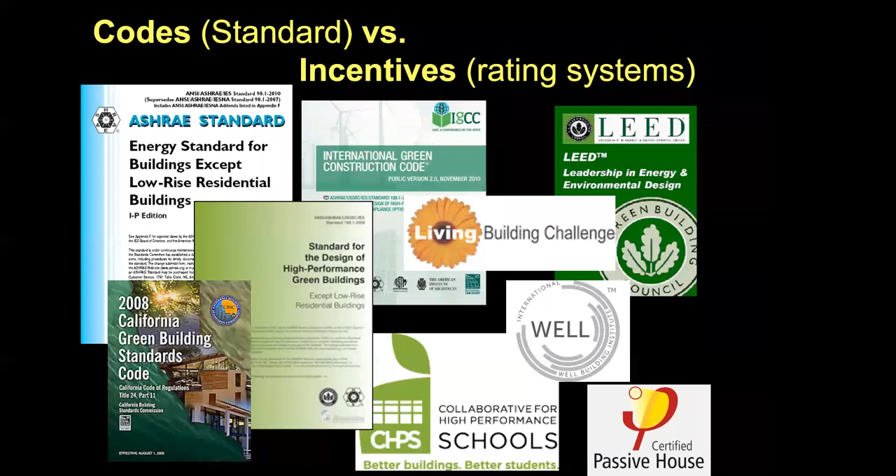So what do I mean when I'm talking about standards and rating systems? I kind of see standards as the floor and rating systems as the ceiling. One way to think about that is: what's the worst we can do? What's the best we can do? Let me break that down a bit. You can see from this screen there's a lot of them out there, and I've only done screenshots of a few as examples.

So what do I mean by this difference? Codes and standards, these are the rules that are the floor. This defines the worst building that you can legally build. So if you ever hear people bragging that, oh yeah, I met Title 24, it's like, well, you kind of had to. That's not anything to brag about.

Now you might hear people say we beat Title 24 by a certain percent, and that is a more appropriate way to phrase your performance. We're going to be talking more about these codes and standards on Monday, but today I'm going to focus more on the incentives, what I call the rating systems. This is where the rules encourage you to do better. It's how high can you go, how much better can you do than standard practice? There's a lot of different systems out there, and what we're going to show is that these rating systems also bring the floor up.

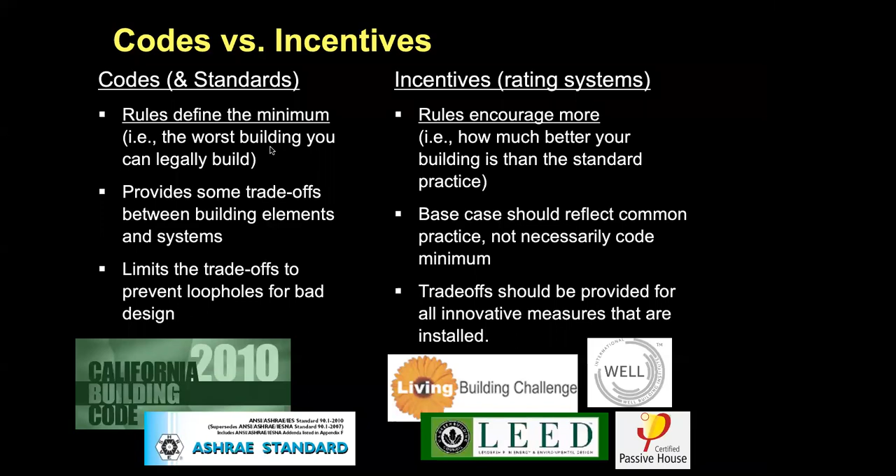So let's start with LEED. Now, a lot of you have probably heard of LEED, it's been out there for a while. LEED stands for Leadership in Energy and Environmental Design. I want to note that LEED is not the only rating system out there, and it also isn't the first. Take a look at all of these icons.

Actually, the first one was developed in the United Kingdom, called BREEAM, first launched in 1990, and it's actually the model for a lot of others that followed. Whereas that one was the first, LEED has actually gotten a lot more attention, but there's a number of others out there from different countries, for different applications, for different building types. Today I'm just going to focus on 3 of these: LEED, the Living Building Challenge, and WELL. Then I'll give you a brief introduction at the end about some of the newest ones that are out there.

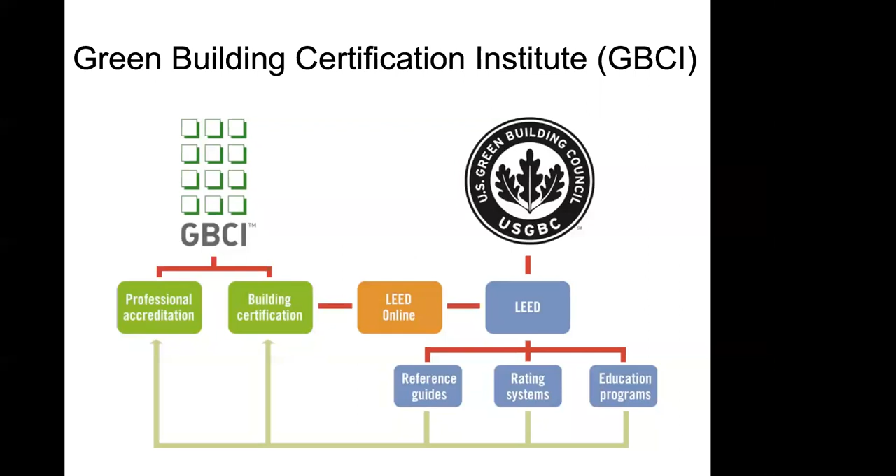And once GBCI was developed, it turns out that a lot of other organizations took advantage of this system, and many are now using GBCI as the independent third-party organization for certification.

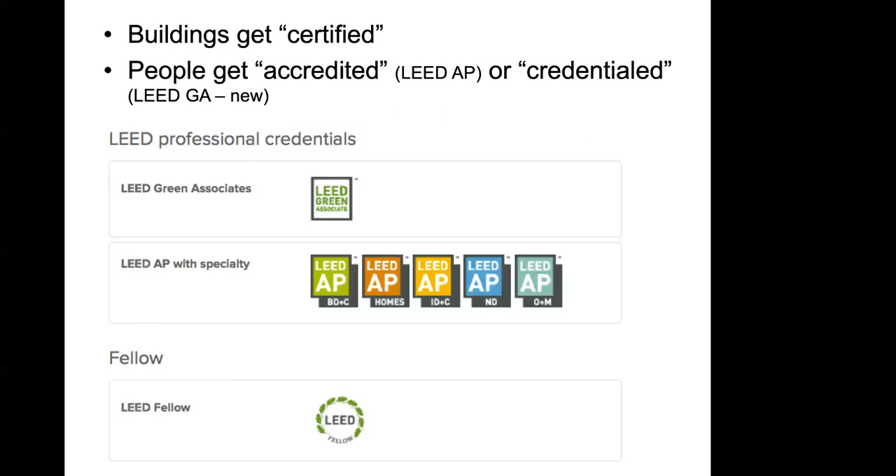LEED in its early years got a lot of criticism, and I think rightly so. There were a lot of problems with it. It really started with an aim of changing our language, changing our focus, transforming the market. And without a doubt, no matter what criticisms are out there about LEED, it has transformed the market, so for that alone it should get a lot of credit.

But it listened to a lot of the early criticism. The current version is LEED version 4, which I'm going to show you in a minute. But LEED 3.0 is really when a lot of the changes took place to address those early criticisms.

As the LEED systems grew, they wanted to harmonize and make things more consistent. But more important are the second and third changes. It was felt like there wasn't enough discrepancy in the points — energy efficiency got the same point as having a bike rack, even if you were in an area people couldn't even bike to. That shouldn't be the same.

So they developed a whole list of environmental impact categories such as climate change and resource depletion, et cetera, and did a lot of analysis to make sure each of the points were given for what matters most. Then the third category was really interesting.

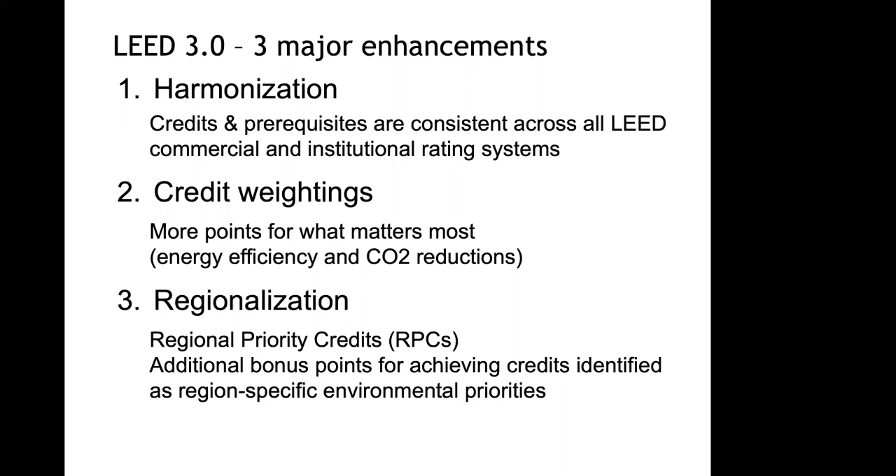So they did this interesting thing: regionalization, by creating regional chapters, councils and affiliates with people of different expertise. For a project-specific location, 6 of the LEED points were identified as high priority for that region, and if the project earned one of those credits, they got an extra point — kind of like extra credit.

Our current version of LEED is LEED v4, officially launched in late 2013, and that was the version with the most rigorous changes. I'm not going to take time to go over all of these — this slide isn't something you'll be tested on, but it's an overview if you want to go back and see what some of those changes were.

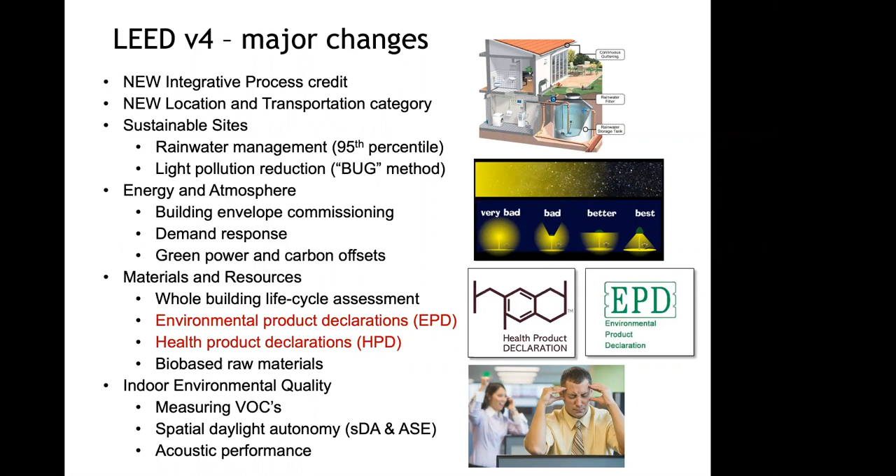What I do want to talk about is the two things identified in red: the environmental product declaration and the health product declaration. These are really important because they're part of a larger movement we're calling the transparency movement — I'll show you more of this later. The idea is that if we can be more transparent and inform design professionals what's actually in their products, they can make informed decisions.

It also motivates manufacturers — if you want credit for people using your product in the building, you have to have an EPD or an HPD. That means if you need to be transparent, you might want to pay more attention to what's actually in your product.

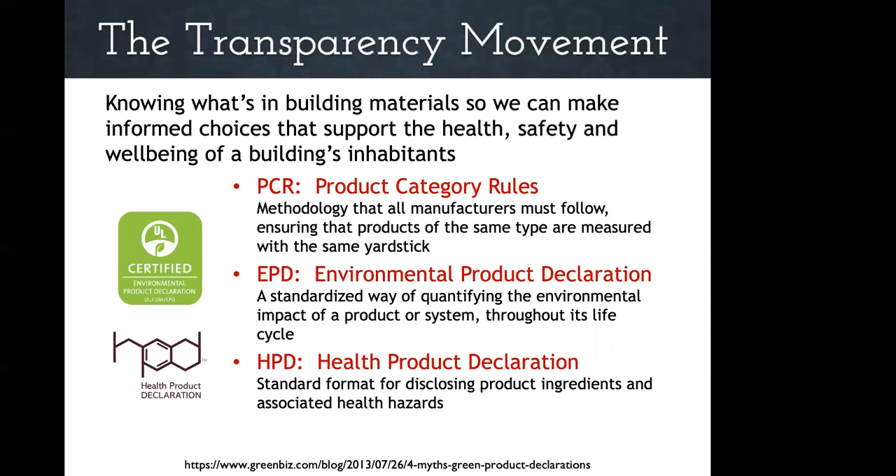The EPDs are basically a report summarizing what comes out of a life cycle analysis — all the environmental impacts from harvesting the material, to transportation, to manufacturing, to disposal. The HPDs include all of that plus the effects on human health. So the HPDs are a lot of what Sarah was talking about yesterday.

So where's LEED heading? I talked about how there's been LEED v3 and then LEED v4, and the whole idea is that this should be a constantly evolving rating system where as we become more educated, as technologies become available, as our ability to simulate and predict performance becomes available, we're continuing to raise the bar so that we become net zero at lower levels of certification, and ultimately things become not just about minimizing the negative, but become regenerative, where you're actually trying to reverse the damage and have a net positive impact on the environment.

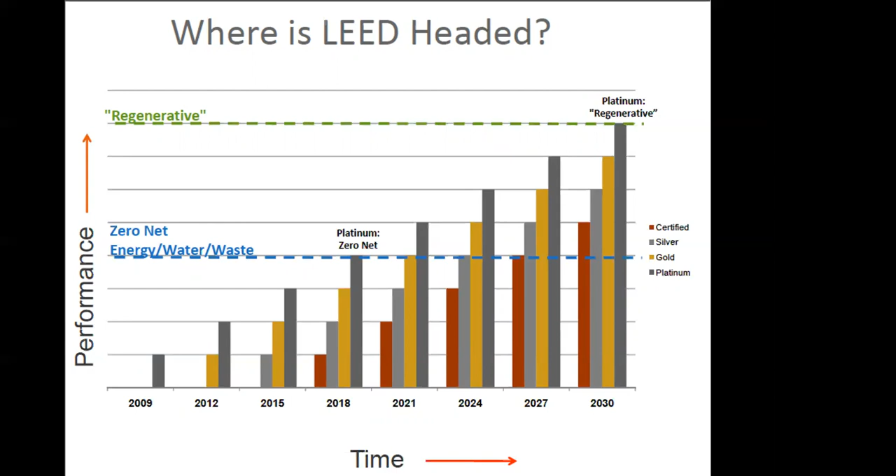And what's happening as the bar gets raised for rating systems, they're lifting up the standards along with them. I think that has been really important. That's where we have a relationship between the floor and the ceiling. So the rating systems are raising the ceiling and they're pulling the floor up with it.

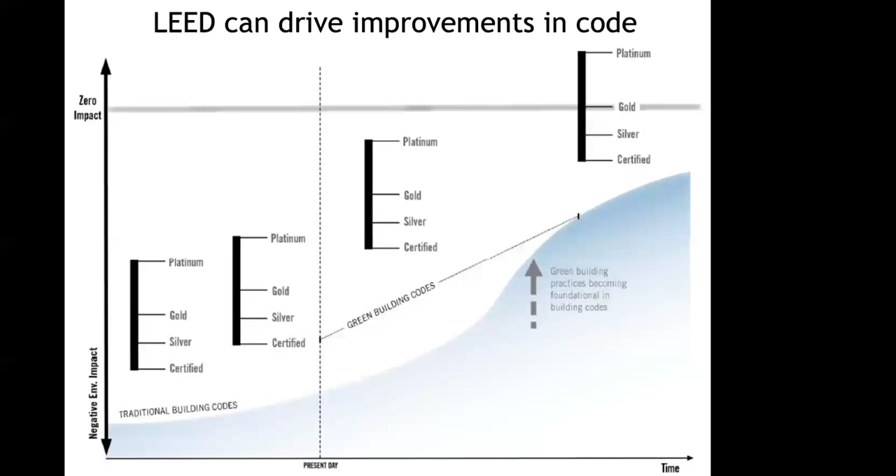All right, so the next thing I want to do is talk about the Living Building Challenge. The Living Building Challenge was put out by the International Living Future Institute. Some people have called it LEED on steroids, so it's a much higher ceiling, if you will. And it uses the metaphor of the flower, because everything's based in nature and rooted in place. I have to say personally, I've always had a little bit of a problem with the idea of a flower—I don't have a problem with flowers, I have a problem with flowers as the metaphor, because durability is really important and flowers are not very durable. So I'm not sure about that, but anyway, that's not that important.

Here's what's really important. The most important differences—and this is a classic exam question, wink, wink—between LEED and the Living Building Challenge are that while LEED has a combination of mandatory measures and point chasing, for the LBC everything is mandatory. So you have to do it. And that's kind of interesting.

The other thing that's really important: whereas with the LEED systems, I said that the only one that requires performance measurement is LEED for existing buildings—everything else is about intent—LBC is only about actual performance. You have to monitor your building for 12 months after occupation to get certified. So no matter what your intent is, you can't even get certified until you've had all of that data.

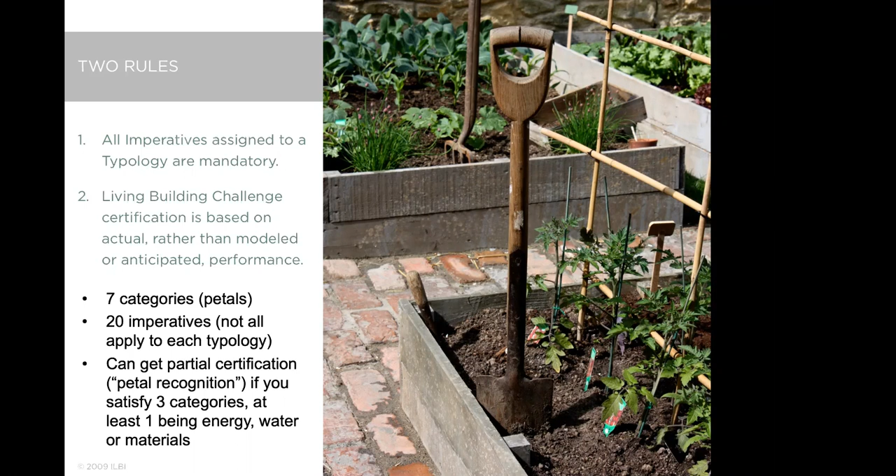So its organization is actually a little bit simpler. Like LEED, it has categories, and they call those petals because of the metaphor of the flower. There are only 20 items, or what they call imperatives. They use the word imperatives because it's all mandatory. You have to have all 20 in order to get certified, but they do allow you to get partial certification called petal recognition if you satisfy only 3 of the 7 categories, with at least one of them being energy, water, or materials.

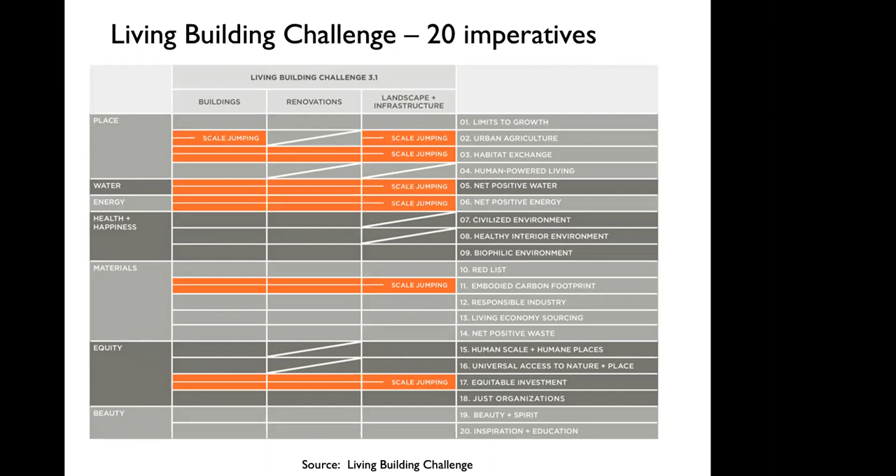And the orange bars represent this idea of scale jumping. So for example, maybe you have photovoltaics, but you're doing it on the community scale because that makes more sense than on each building. So there's a way of jumping across scales.

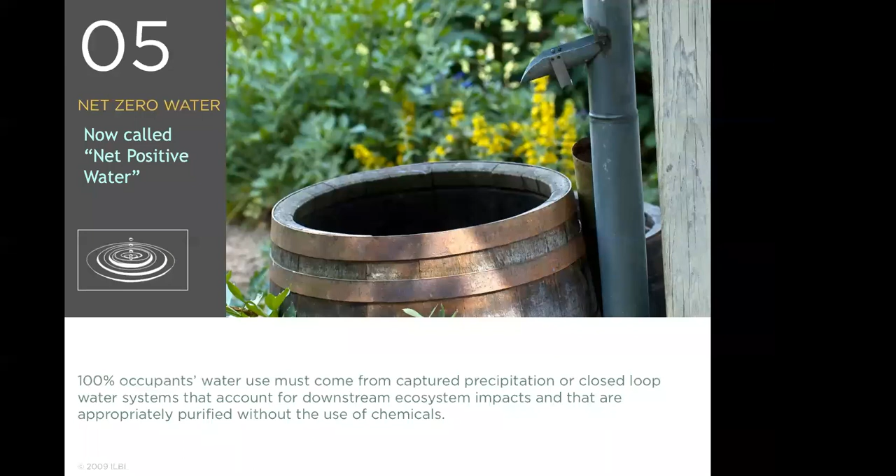So let me give you a few examples of some of these imperatives, the ones that I think really set a high bar or are most relevant to what we're talking about in this class. Any building that gets Living Building Challenge certified has to be net zero, now called net positive water. This means all water must come from captured rainwater or closed water systems where you're cleansing the water, gray water systems.

We talk a lot in this class about net zero energy, which is also now called net positive energy, and we've talked about that. This is where on a net annual basis, you are generating at least, but in fact now more than, you're actually using.

And then Sarah referred to the red list. This is probably the hardest imperative to meet. There's a really long list of chemicals that you cannot have in your building, and even on the job site while you're constructing it. So I've heard from practitioners that this is really the hardest bar.

Now, two more that are really interesting that I wanted to share with you. One is called the beauty and spirit imperative, which really speaks to the heart of the project, suggesting that every project should have some features that are solely intended for human delight. Now, how would you measure something like that?

It's interesting, there are different ways. Some people have actually used the CBE survey as a way of getting occupant feedback to measure this. But when the Living Building Challenge was first being launched and talked about, one person made this wonderful suggestion, that the way this imperative should be measured is: the project should make 1 in 50 people smile, 1 in 100 people laugh, and 1 in 200 people cry. Now, of course, documenting these statistics would be very difficult, but when's the last time you even heard someone talk about the built environment in this way?

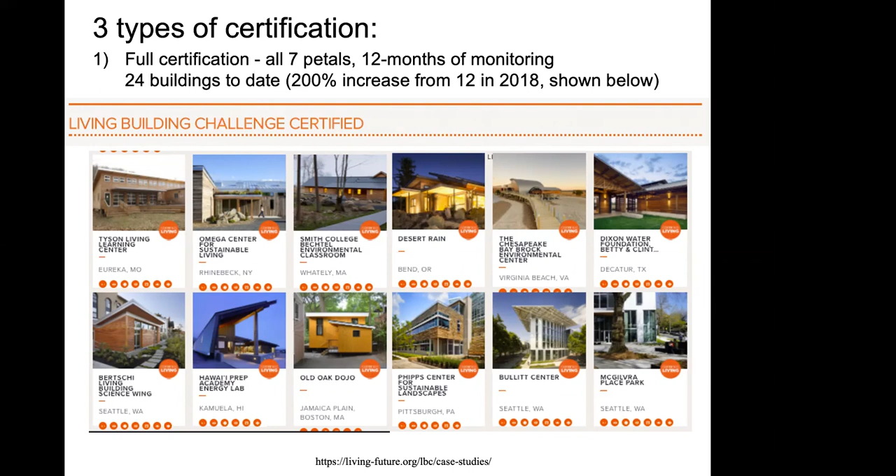Remember, you can also do petal recognition, where you have to meet just 3 of the 7 categories, but at least one of those has to be what's considered the most important, which is energy, water, or materials.

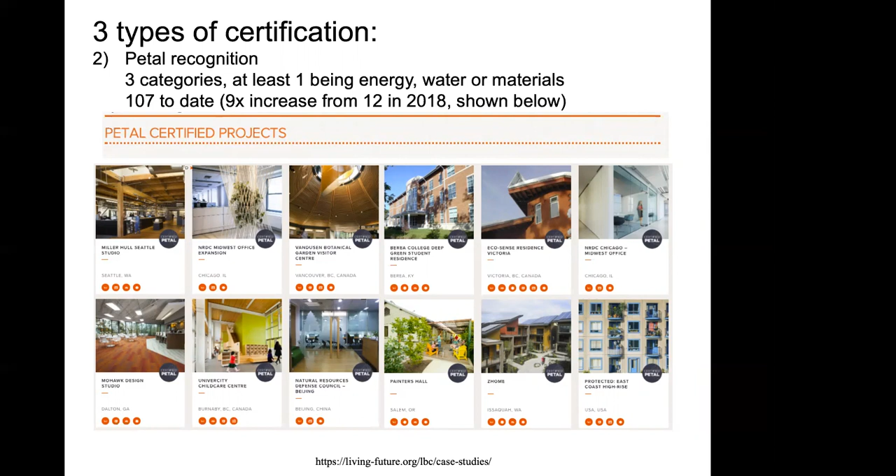There are 3 types: full certification, petal certification, and then they created the net zero energy building certification. That's where it must meet the imperatives, not only the net zero energy imperative, but also other imperatives like limits to growth and rights to nature, which involve access to air and sunlight, biophilic design, and the beauty and spirit I mentioned.

There are 37 projects that are now net zero energy building certified. That doesn't mean these are the only net zero energy buildings out there—there are a lot of net zero energy buildings out there, they just didn't need this label.

I'll pause again for any questions on the LBC before I move on. None? Last chance, 5, 4, 3. Oh, there we go, okay.

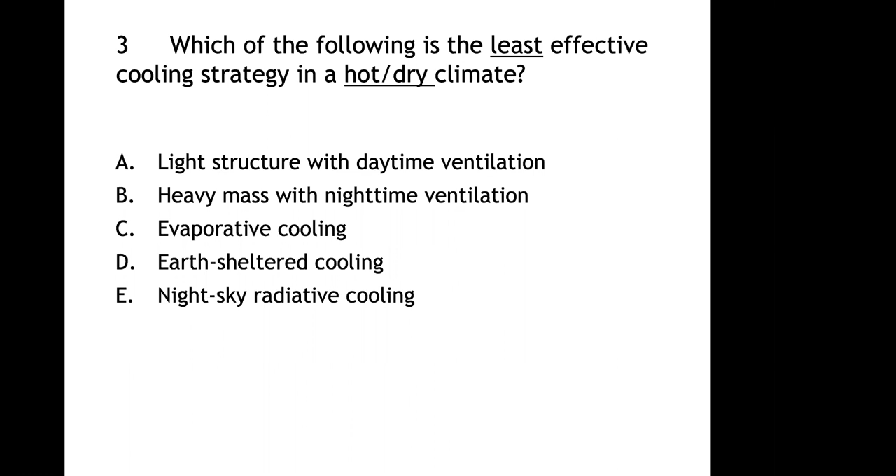Which of the following is the least effective? The answer is A, the light structure with daytime ventilation. Remember, there's a lot more options for passive cooling in a dry climate, and all of the others work well there, but the daytime ventilation is really best for bodily cooling in a humid climate.

Evaporative cooling strategy, spraying water is less effective - that is false. Remember, we talked about the surface area is important. So for spraying water in the air, the surface area of every droplet is what's affecting the rate of evaporative cooling. This was from Stett's lecture.

Drum roll, the answer is XPS foam. He talked about it, he showed graphs, and without a doubt, that was just over and above, had the highest embodied carbon, evil material.

And then finally, this is also from one of the graphs he showed: as a building becomes more energy efficient, embodied carbon becomes a larger percent of the building's total emissions, and this is true. The total carbon emissions from a building is its embodied carbon when it is first constructed, plus its operational carbon over the lifetime of the building. And the more energy efficient, the larger the percentage of that embodied carbon in the beginning.

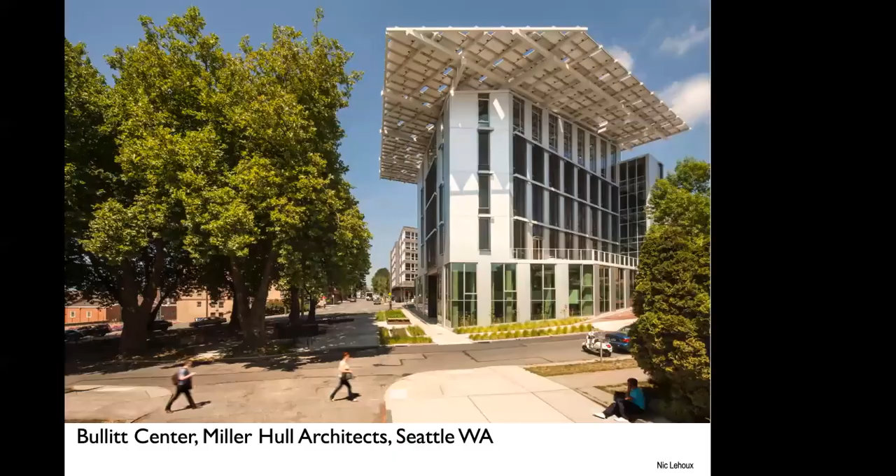Okay, let's move on now. I wanted to describe a little bit about the Bullitt Center, which is the largest building to date, I understand, that has gotten full living building certification. Rob Peña, our speaker on the second daylighting project, was heavily involved in this. He talked about it a little bit, so I just wanted to tell you a little bit more.

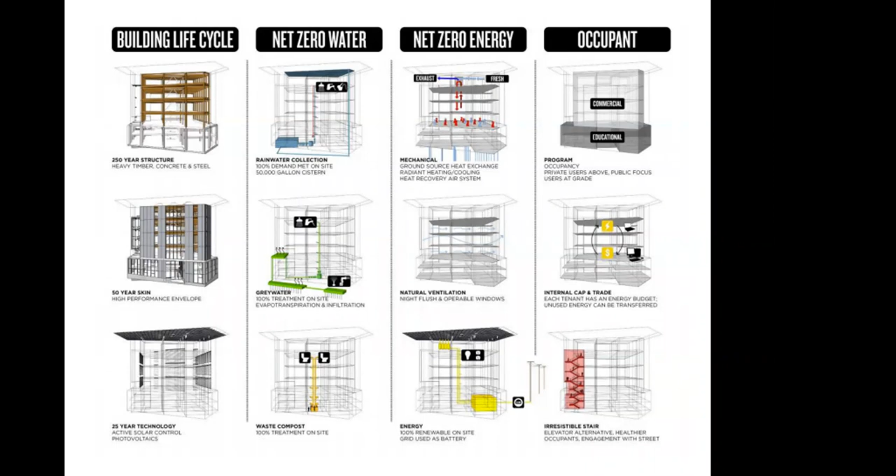This diagram, I'm not going to go over in detail, but I'm showing it to inspire you to look at it on your own. I think it's one of the more cohesive ways I've seen somebody try to present the way in which the strategies in a building are organized. This one looks at life cycle, water, energy, and occupant issues, and some of the systems at different scales. So this is a really nice way of organizing data and strategies - maybe that's something that you can be inspired by.

As well as this one, you see a lot of diagrams from projects talking about the systems in a building, and this is also one that I think was really well organized by breaking it down into the heating and cooling, the envelope, the energy, and the water conservation.

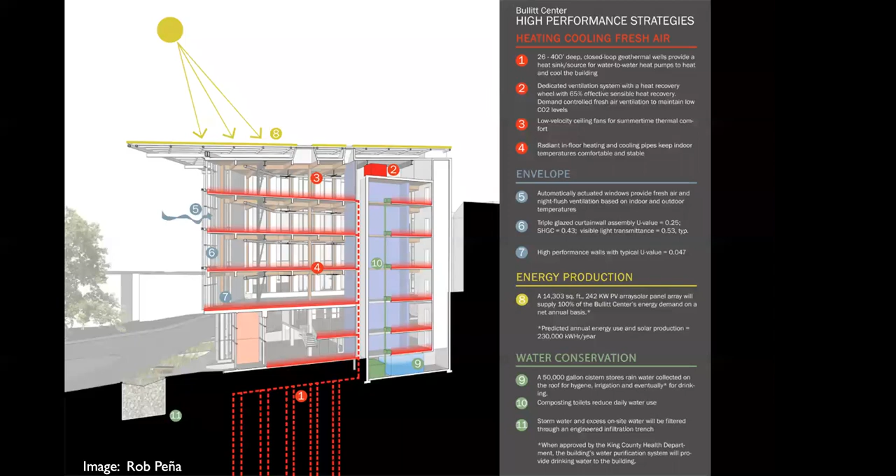So for this building, it's getting all its energy either from the sun, hitting the photovoltaics on the rooftop, which is what we'll be talking about in a moment, and it's also got a geothermal system for generating heating and cooling as well.

Highlighting a few of the strategies in the building for energy conservation - the first way to approach energy conservation is to make sure you have a really good high performance envelope.

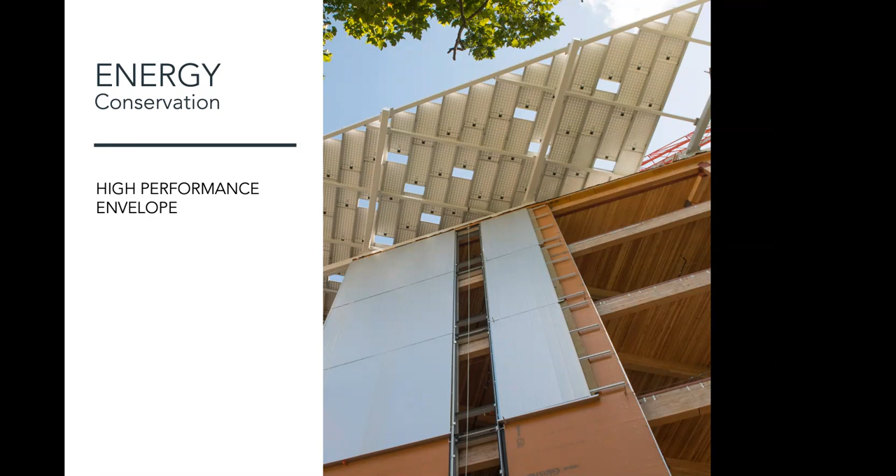Well, that's what they did, but in this case the manufacturer decided to reformulate, and the first application of this new product is on this building. What's interesting is it also benefited the manufacturer, because now they can market this material as a product that meets LBC certification. So this is a great example of market transformation.

So why is that a benefit? Well, a few things. One, when it closes you get this really tight, even seal across the entire perimeter, as opposed to casement windows that angle. It also allows you to open the windows when the blinds are down. And it also allows you to better utilize buoyancy-driven flow for stack ventilation when there's not a lot of wind pressure outside, because you can have air that comes in the bottom and then out through the top.

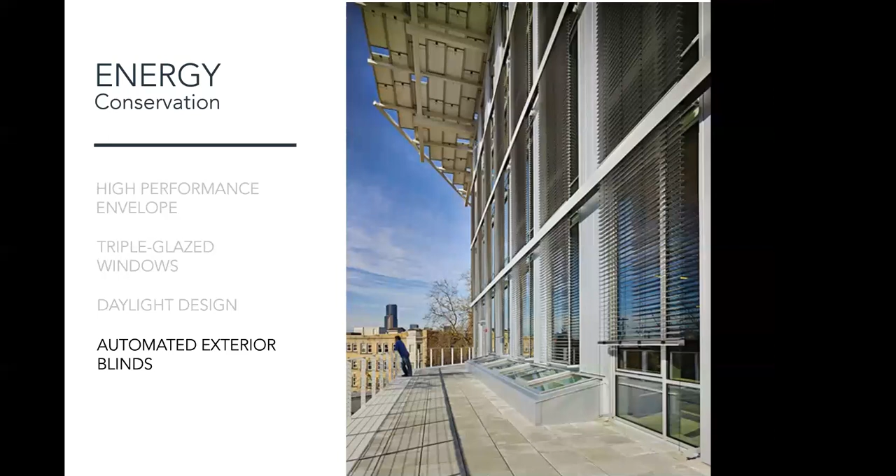I believe Rob showed this picture as well, with the automated exterior blinds. Now, while fixed shading is more durable, and that's what we're teaching you how to do in ARC 140, in a climate like Seattle where it's really overcast on a day you want to get a bit more view, it's really nice to get those completely out of the way. Aesthetically on the outside, they really liked that it gave a very dynamic quality to the exterior facade, really changing its texture.

So the mechanical system - one of the things that this and a lot of net zero energy buildings do is separate the ventilation system and the thermal system. For their thermal system it's radiant, and this is showing all of the PEX tubing in the floor.

They also have a really large system for rainwater collection. The Bullitt Center gets 100% of its water from rainwater collection, which on one hand is pretty extraordinary for a large urban office building. You'd imagine it's got a relatively small roof compared to the number of floors, but it is Seattle and they get a lot of rain.

So what you're seeing here is what's called the day tank, which is the purified rainwater. Behind the wall are 50,000 gallons of collection in a cistern, and the rainwater gets collected in the cistern and goes through a bunch of different layers of a filtration system. The highly filtered water is in the day tank, and that's what needs to be used on a daily basis.

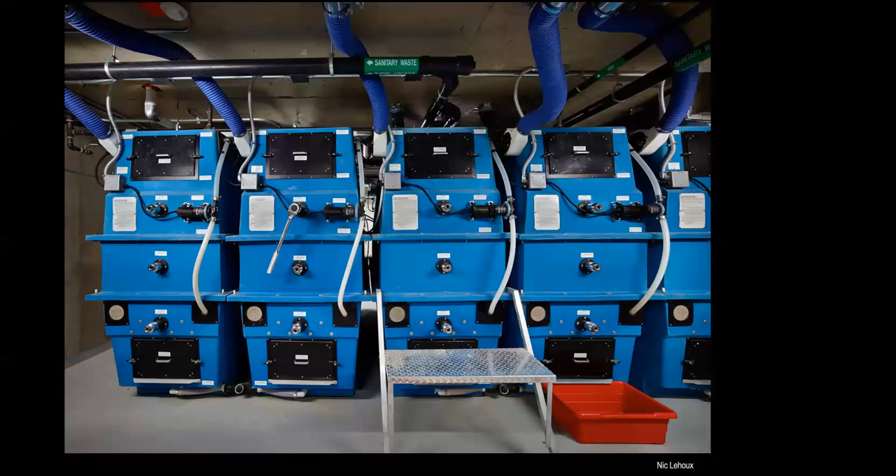It also has a really sophisticated waste management system. These are composters, an aerobic digester system. Each one is hard to see the scale of, so I wanted to show you this picture. Each of those blue tanks is the size of one of these little Fiat 500 clown cars, and there's 10 of them.

The way the aerobic composters work is that you need fuel, heat, and air. The fuel is coming from us, the toilets. The heat is coming from the toilet paper, and they throw wood chips in there, which breaks down and releases heat. The air that's needed actually comes from the bathrooms themselves. The bathrooms are the only space in the building with mechanical ventilation. They also have operable windows, so air comes in through the windows, and the return air goes down through the toilets and into the composters, keeping the odors down.

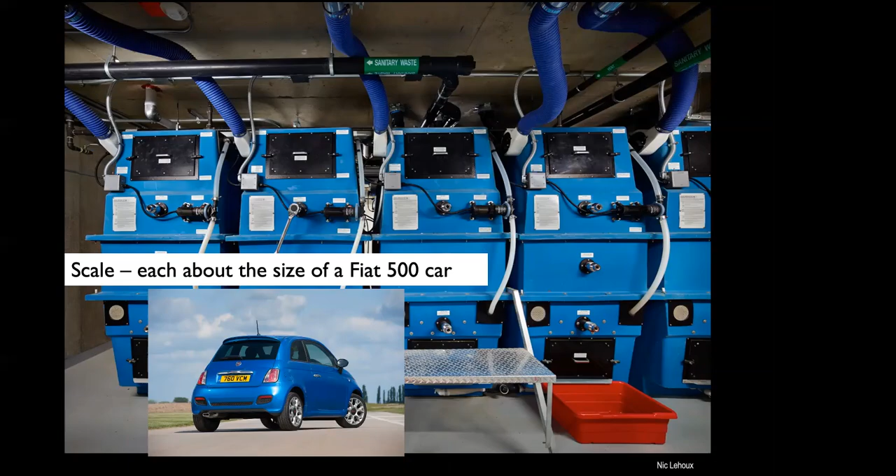Now I want to talk about the energy performance of this building. The first graph I want to show is a comparison of the EUI, the energy use intensity, of a typical building of that size and climate. The colors represent the different kinds of loads in a building. Typically, about three-quarters of the load might be for systems, heating, cooling, and lighting, and a quarter or less might be plug loads, which come from occupants.

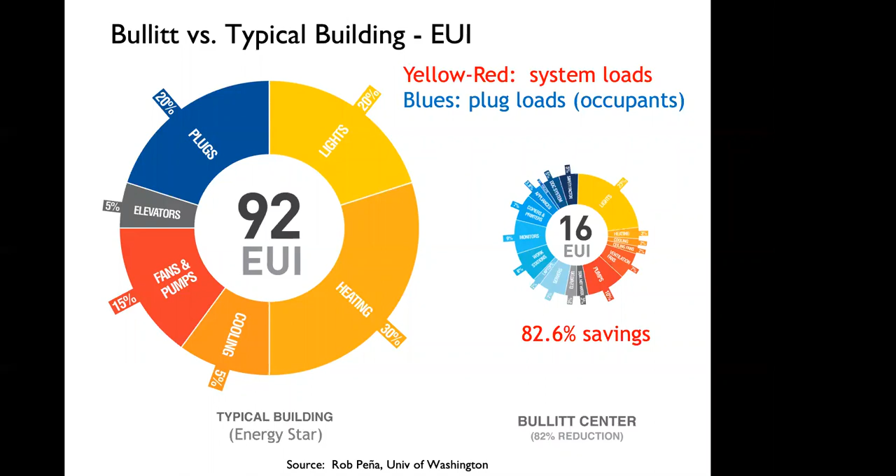They had to set a target, and I'll show you why, of only 16 EUI, meaning they had to achieve over 80% savings in this building. As you get a building more and more efficient, the percentage of that building's load represented by occupants becomes much bigger. So to achieve that 16, because the occupant percentage was bigger, they really had to pay a lot of attention to those plug loads.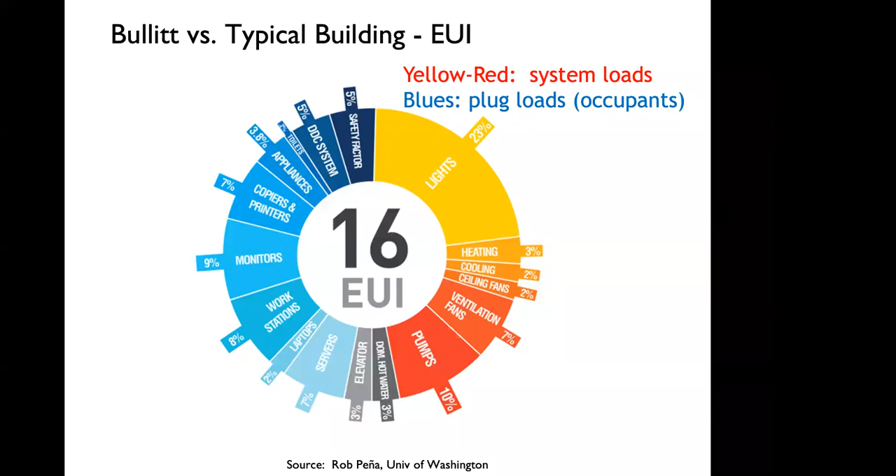I want to talk for a moment about process, because it needs to be really different in a building like this. There are two main questions: what can be supplied—how much roof area and how much PV do you have—and what's being used, meaning how much energy the building needs. In most processes, question two comes first. But in this process, step one needed to go first, and I'm going to show you why.

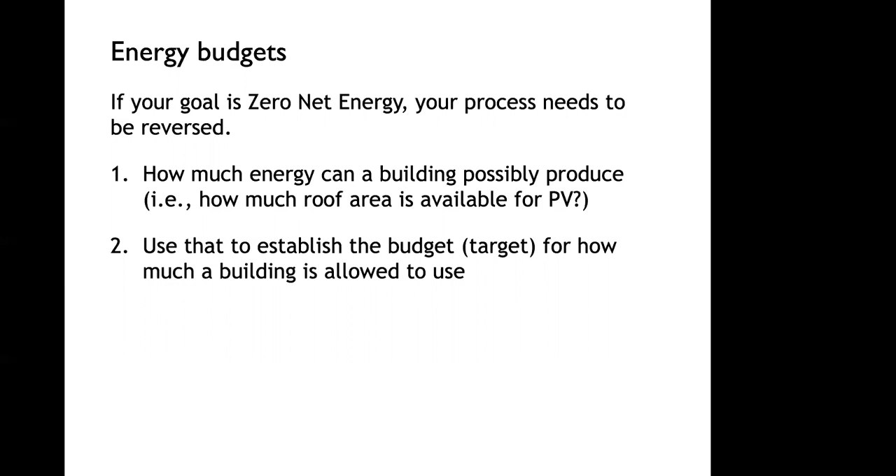If you started with number two and asked how much energy this building would use, and therefore how much roof area you'd need, this is what would happen. First, I want to point out that I showed you a graph where a typical building had 92 as the typical EUI for a building of this size.

This was a different phase of analysis, a different group, and they came up with 72. Don't worry about the actual number, it doesn't really matter. But if a typical building used 72 kBTUs per square foot per year, you'd need 64,000 square feet of PV, while the building is only 10,000 square feet. That's 6.5 times the footprint of the building—just not possible.

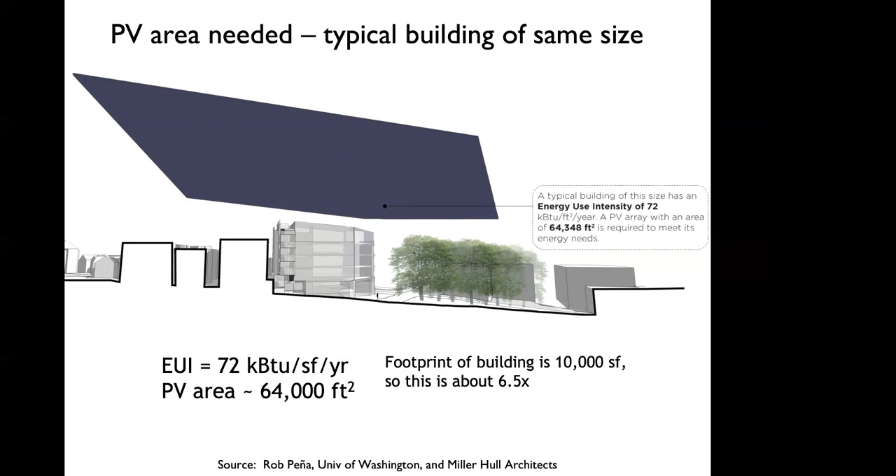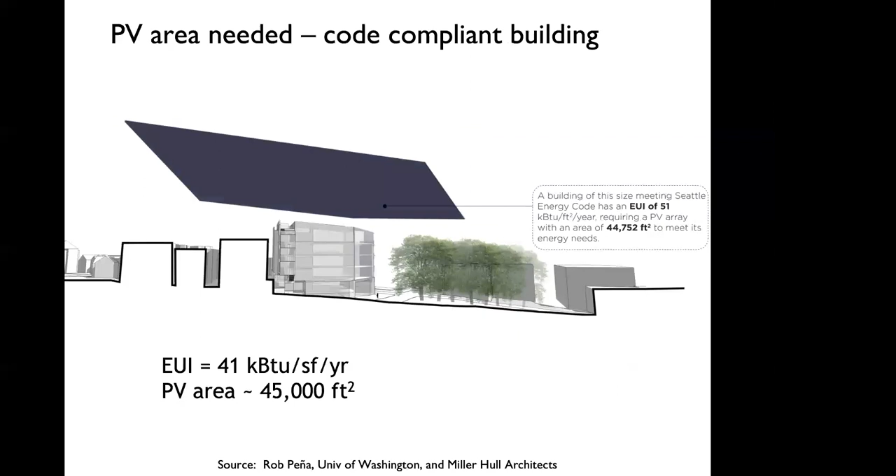So they started with typical, and the analysis team said, well, a lot of typical buildings don't comply with current code—remember, the floor kept rising—so what does current code require? That was 41. A bit better, but the PV area required would still be 4.5 times the area of the building. That's not going to happen.

They said, well, what if LEED was our criteria—if we were going to achieve LEED Platinum, what would we have to do? That lowered the EUI to 32, but you're still almost three times the footprint of the building. At that point they realized they couldn't use these rating systems or codes to set their target. They had to flip the whole process around.

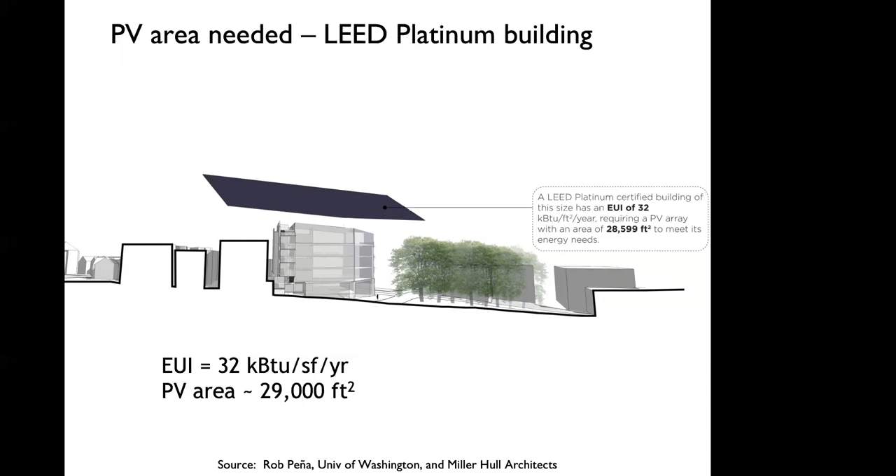What if they started with the question: how big is the roof, how big an overhang can we have? Then look at how much energy can be produced with that area, and how efficient the building needs to be. That's what they did. They had a 10,000 square foot footprint and got permission for a hat larger than the footprint, but still reasonable, 14,000 square feet. For that area, they figured out how much energy could be produced, and determined they had to create a building using energy at only 16 kBTUs per square foot per year, because that's the only way to achieve net zero.

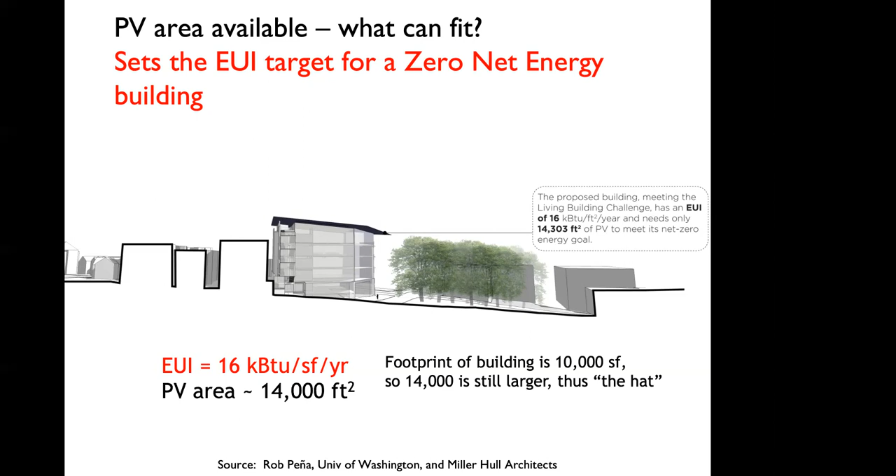So that's how they got to this target number of 16. The next step is to figure out how to get to 16. Now we're working with a different team, the same team that came up with the 92. Don't worry about that, that's not as important. I just want to go through the steps.

If you remember that inverted triangle I've shown a few times in class, the first steps are reduce the loads of the building, all the stuff we're doing in 140. How do you do a high performance envelope? How do you use passive cooling? Then they were also looking at how do we make our systems more efficient? After doing all of that, they got the EUI down to 42.

Not enough. Now they focused on lighting. How do you maximize daylighting? The kinds of things we're talking about in this class. How do you have controls to then minimize the electric lighting power? Got that down to 32.

They still had to split that in half. That's where that last bar, they had to look at all of those blue parts of the pie chart I showed you. What are we going to do about the plug loads in the building? What are we going to do about occupant behavior? How do we minimize use of elevators? How do we control what kinds of computers they bring in, since laptops use so much less energy than desktops? How do we control phantom loads in the building, the amount of energy appliances are still using even when you think they're not, because you've turned them off? All of those things got it down to a target EUI of 16.

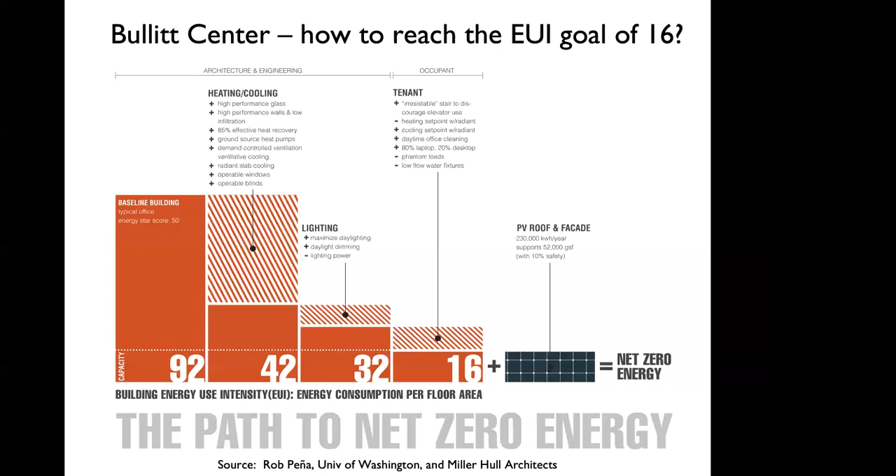So how's the building actually operating? Let's take a look at that. It actually did really well in its first 3 years.

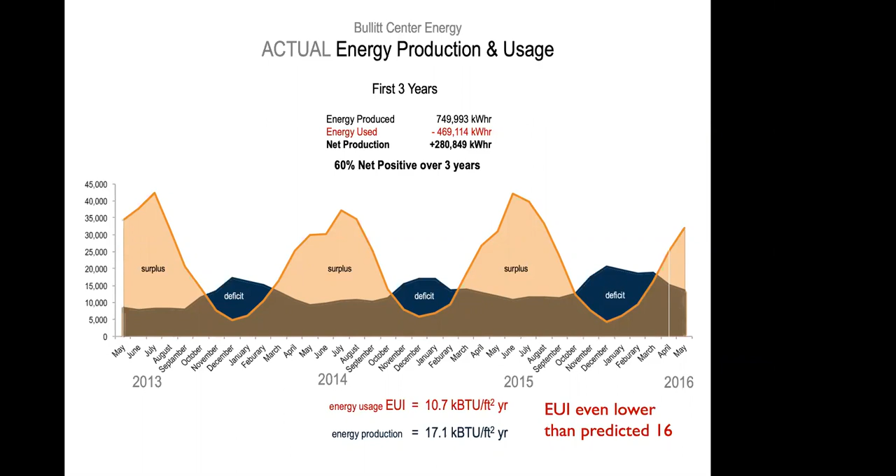Another question: can you buy energy from a renewable source off-site to reach net zero? A great question. Net zero is defined in different ways. For this particular certification, they're very stringent, and they want you to achieve it using on-site renewables. Other kinds of certifications may be looser, and if you're buying energy from a renewable source, that may be okay, but the more stringent requirements of net zero energy is about on-site generation. Great questions, Maya.

All right, I've got about 10 minutes left, I'm right on time here. So what I want to do is cover just a few new certifications that are out there, and then give you an overview of one last system called the WELL certification.

ILFI, the International Living Future Institute, developed the Living Building Challenge, and they're also doing the Zero Energy certification I talked about, but they're developing a lot more. They're developing the Living Product Challenge now, which takes the rigor applied to buildings and says now you can actually get your product certified, and that will help people buy it.

So it'll help the manufacturer, it'll help transform the market. They're also generating a lot of these transparency labels. I talked about the transparency movement, and the idea is that if you tell people more about what's in your products, that helps designers make better decisions, and it helps manufacturers because if you're transparent about what's in your product, maybe more people would actually buy it. It's a little bit like the food labels on food products.

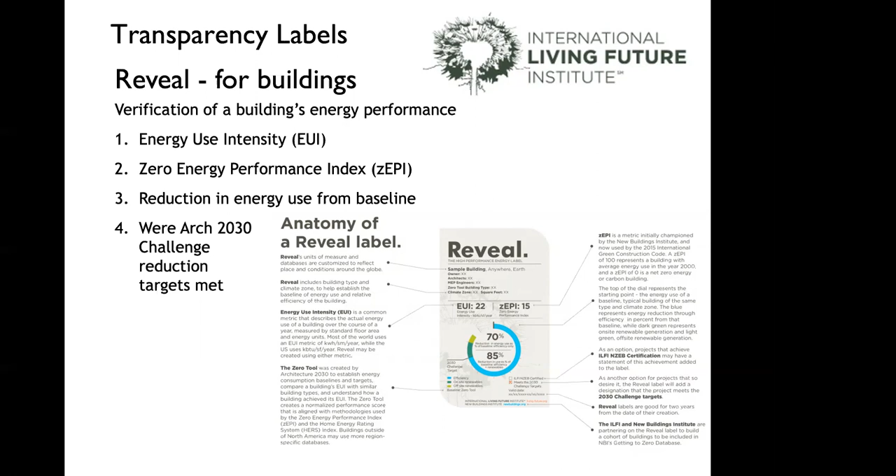So it's a nutrition label for your organization. How are you treating your employees, right? Where do you invest in charity? What are you doing in terms of environmental stewardship? So that's actually pretty cool.

There was a question, can a public entity get JUST certified? I have no idea, I don't see why not. It's for organizations and companies. I don't think there's any distinction between public and private.

All right, so in the last little bit I have here, I just want to introduce you to the new kid on the block, which is the WELL Building Standard. This is a standard that is all about the people. It's about trying to create an indoor environment that is good for us, for human health and well-being. And it took a long time to develop. It's very evidence-based. Sarah actually had a quiz about this.

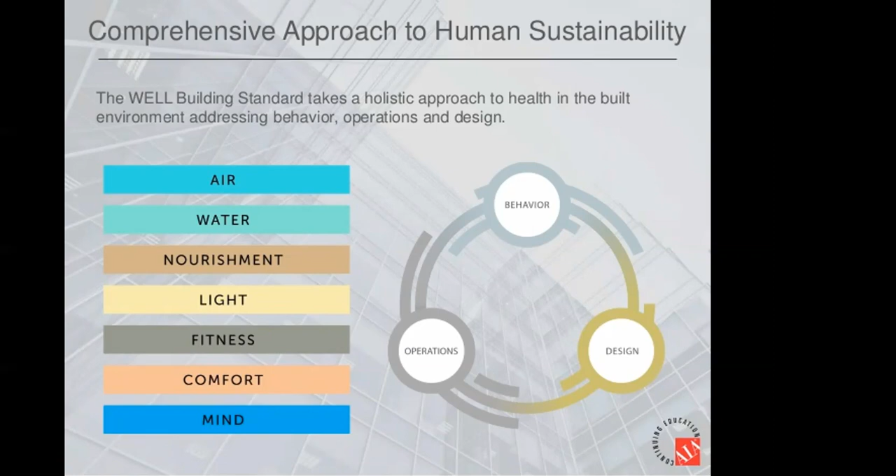Nourishment: do you provide food for your employees? What are the cafes in your building, and do they have healthy menus? Light: is there a lot of natural daylight, and are you supporting circadian health? Do you have opportunities for people to move, sit-stand desks, compelling staircases, fitness programs? Comfort: thermal comfort isn't just about the environmental conditions, but what kind of controls do you have in the space? And then a lot of different credits for mind and spirit.

It's similar, I keep using the analogy of nutrition labels. They have a scorecard where for each of those categories, you get checked for how well you're actually doing. And a little bit like Living Building Challenge, this is not about intent, this is about operation. The certifiers have to go into your building and see how things are actually operating.

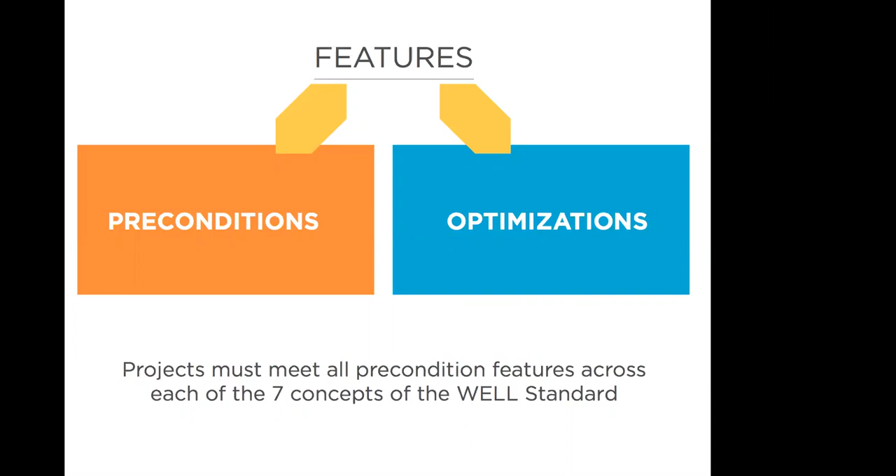Similar to LEED, they have mandatory measures, they call them preconditions. LEED has points, they call those optimizations, different words for the same concept, and they have those across all 7 categories. Also similar to LEED, you can get certified at these different levels of silver, gold, and platinum. And as a person, just like you can be a LEED AP, you can be a WELL AP and demonstrate that you're familiar with this.

My final slide here - I see a comment that WELL version 2 has 10 concepts now. Thank you, Alfonso, for reminding me about that. It is hard to keep up. I love it when my students know more than I do about something.

I'm on their scientific advisory board, and I have been so impressed with the work they're doing. It is the largest facility I've ever seen where they're trying to simulate real world conditions in carefully controlled laboratory environments. You saw our little room, this is our chamber - this is like that on steroids. They can bring in people to work in there for months because it's set up as real office space. They've got spaces set up as residential living spaces that people can move into for months and be part of this study, and they are doing amazing work.